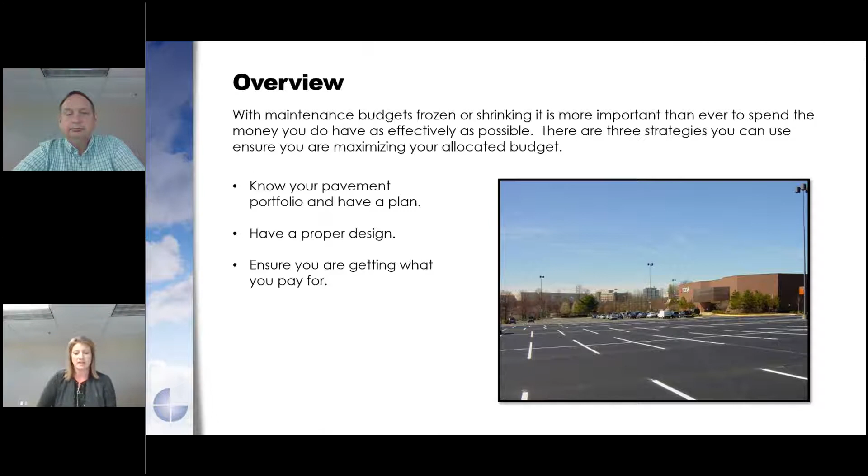So the overview for today: Troy and I are going to share with you the 3-point strategy that we feel you could follow to best manage your pavement assets. Why is this important today? Well, in light of COVID-19, we're seeing budgets frozen and less money available for projects. So now more than ever, it's important that you are as effectively as possible managing and maximizing your allocated budget. We hope you find the tips we share today helpful.

The first step in the 3 points is evaluation. Really, when it comes to evaluation, it is knowing what you have and what it needs. In some cases, we actually find that your pavement or your roof is valued at more than what you think.

So we are going to start off with our first poll question today. Ben will be leading the poll question, but just to give you a heads up, the question is: what is the average asset value of an asphalt parking lot per square yard?

As Elise mentioned, we are looking to see what your thoughts are on the average asset value of asphalt. We have 4 options: $35 a square yard, $45 a square yard, $55, and $65 a square yard.

As we wait for everybody to have a chance to respond, I thought I'd take this opportunity to ask Troy, with your history as a contractor, how has that shaped your perspective as a consultant, or given you more insight into the construction aspect of benchmark services?

Well, I'd have to say, Ben, that from a design standpoint, when we're putting together designs for rebuilding parking lots, I've got the background to know what the contractors can do in certain size areas. Some methods of construction won't work well in smaller areas. That's a big benefit, knowing what the contractors can and can't do as far as equipment.

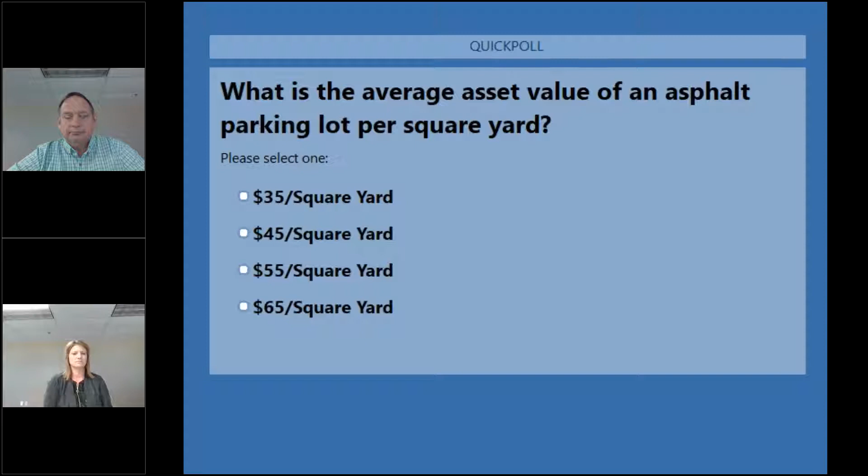Thanks, Troy. We have a few more votes coming in, so I'm going to go ahead and close that now.

And the results: 9% voted that they think it's $35 a square yard, 36% voted $45 a square yard, 45% voted $55 a square yard, and 9% voted $65 a square yard.

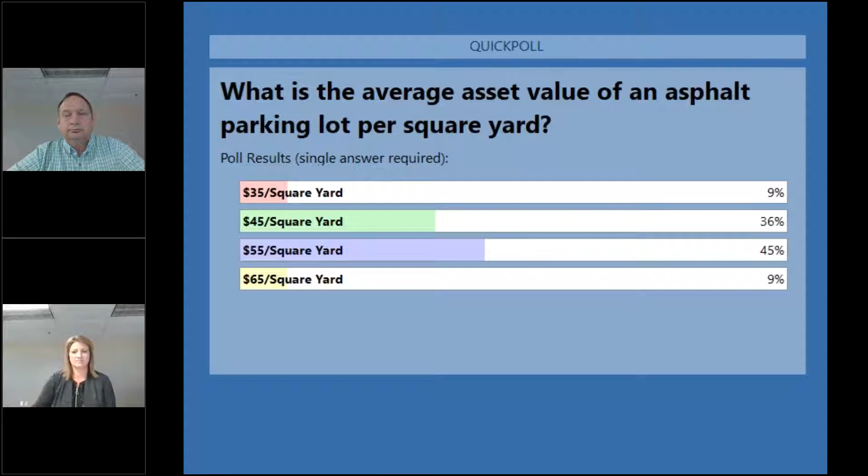All right, thank you, Ben. So the average asset value for an asphalt parking lot is $45 a square yard, and we will preface this with saying this is a very rough estimate. It can change based on geographic location.

We also wanted to include, while we didn't have a question for you to answer, the average asset value for a concrete trucking area, approximately $110 a square yard. So why do we share this with you? Well, we share this with you today just to give you an easy way to quickly determine what your asset value may be.

So with a typical car stall, it'd be between $1,500 and $2,000 per car stall. And with a trailer stall, we'd be looking at about $5,000 to $6,000.

So let's say you have a 500 car stall asphalt parking lot. Your asset value for that lot would be between $750,000 and $1 million. And if we were to relate that to a trailer stall, if you had 300 trailer stalls, the asset value would be approximately $1.5 million to $1.8 million. So those are definitely high asset values and something that you want to preserve and take care of.

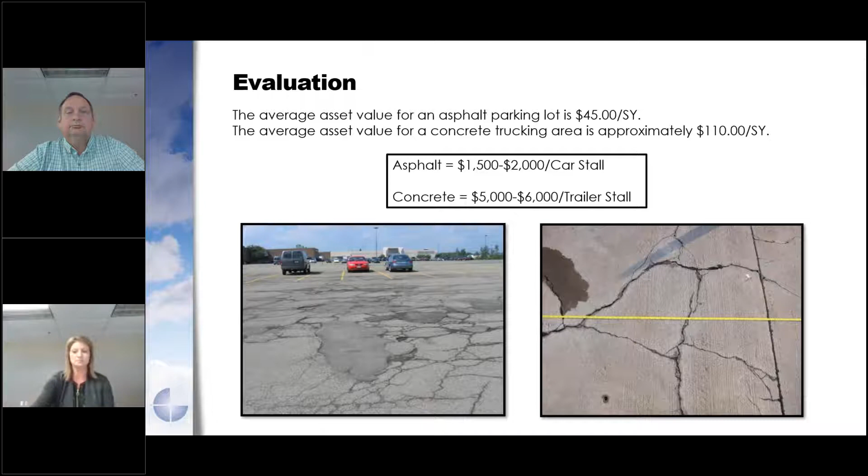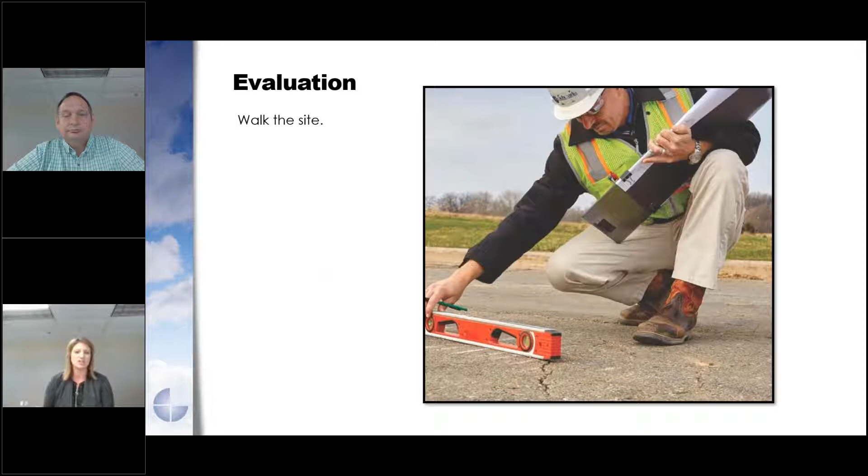So when it comes to the evaluation, the very first thing that we would recommend you do is walk the site. As Troy likes to say, boots on the ground. So making sure that somebody is physically walking your site and observing all the different conditions, taking a fresh set of eyes and looking at each individual section, each individual area, and getting a general overview of what those conditions are.

Then during that evaluation process, we would recommend that you document your findings. Things you may want to document would be your areas of repair, areas that need maintenance, maybe an area that needs an overlay. You may also want to document your photo locations.

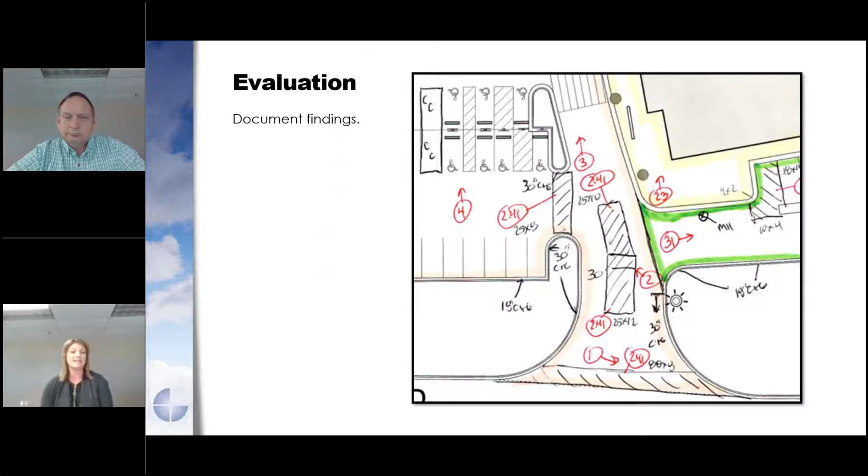It's always important that when you're out walking the site that you're also taking photos. You may want to take photos of general areas and general conditions, and then specific deteriorated areas. You'll see here the example on the plan, we show the little photo bubble listed so that we could then reference the photo at a later date. So that may be something. You would also want to document any safety issues that you may find as well.

So during the evaluation process, you've walked the site, evaluated things, and then you also want to measure the areas. So when we say measure the areas, we mean the areas of repair, but also making sure that you have correct measurements for your site.

And why is it important to have measurements? Well, it's important because if you were to give this plan that you're putting together to a contractor to price for you, you would want to make sure that their proposal, when they get it back, can be cross-referenced and that it does tie off to the dimensions and the areas you have identified that need repair during your evaluation process.

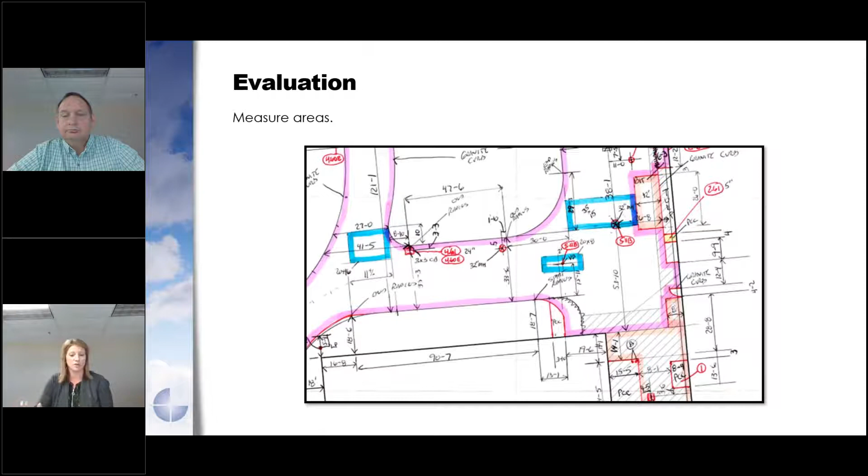These are really good documents to have when you're going for funding. If you have to go up the corporate ladder, having actual data to back up what you're requesting will make it a lot easier for you to secure funds for your projects.

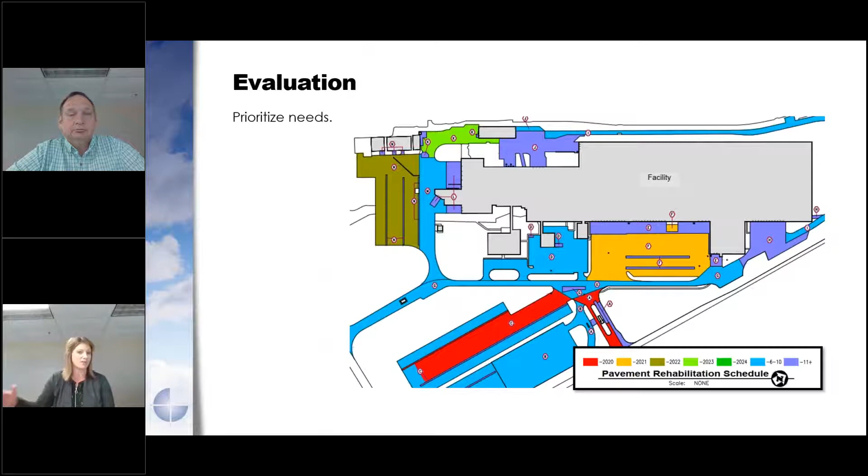Absolutely, great point, Troy. And it is showing not just a single year that you're planning to request money for, but that you have a long-term plan in place for maintaining your pavement asset.

So another piece of the evaluation is planning. Once you've walked your site, documented your conditions, measured your site, and put together the priority plan, the next thing you need to do is determine the course of action that's needed in each individual section.

You may have thousands and thousands of square yards of pavement at your site, and not everything is in the same condition. So you need to assess each of those conditions to determine if maintenance work might need to be done, or maybe rehabilitation work may need to be done.

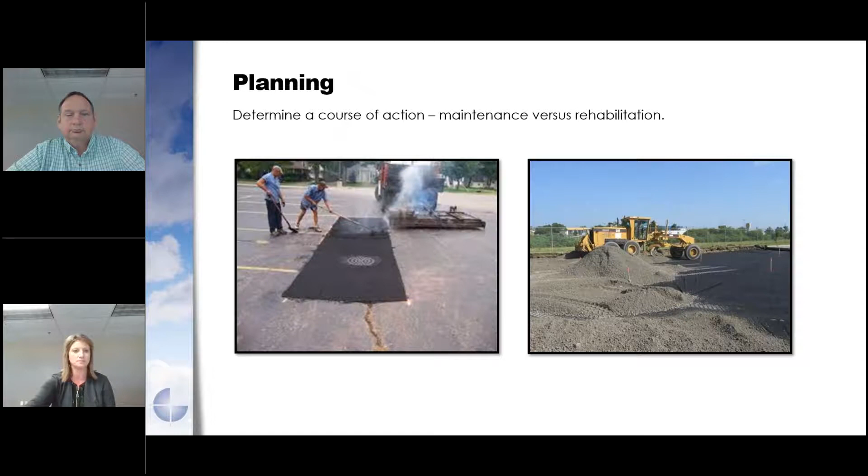I'm going to share with you a picture of a typical deterioration curve, with no maintenance being done. We're sharing this because we have a poll question coming up, and just want to get you familiar with the different conditions.

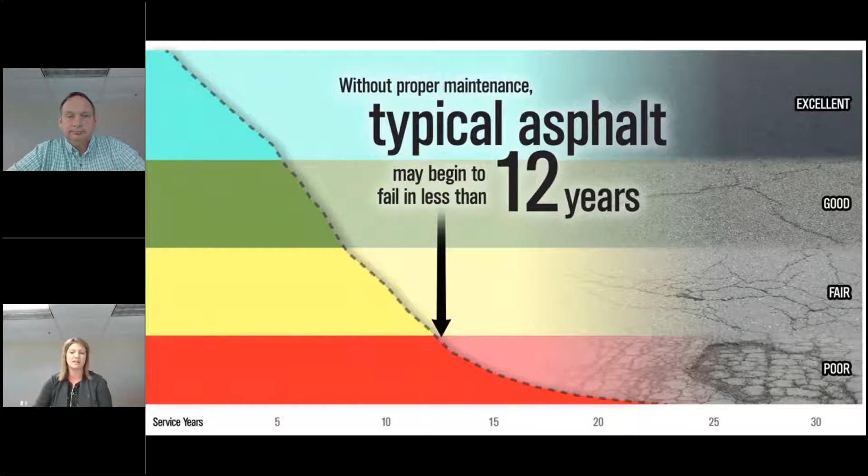So we're going to have another poll question here, and I will hand this over to Ben for poll question number 2. Thanks, Elise. Poll question number 2 is: which of your pavements should you spend your money on first? Excellent pavements, good pavements, fair pavements, or poor pavements?

And while we give people time to respond, Elise, I absolutely love your dog, Rue, and just wanted to get an update to see how he's doing.

Oh my goodness, Rue, well, she is mischievous. She is my one-year-old mini golden doodle, and I absolutely adore her. Funny story, Ben—yesterday morning I was working out and she was being pretty quiet, and I thought, I'm gonna go check on the dog after I'm done. Well, she clearly doesn't understand the shortage of toilet paper, because in the living room she had an entire roll of toilet paper and had destroyed the entire thing. So I think we need to talk to her about the shortage of toilet paper, because we can't afford to have her continue to do that. But she's definitely mischievous, and super cute. She keeps us on our toes.

That is good to hear. And we added a photo here, so we'll be able to share a photo, and everybody can see how adorable Rue is.

It looks like our answers are all coming in, so I'm going to go ahead and close the poll. And here are the results: 6% said you should spend money on your excellent pavement first, 31% said spend money on good pavements first.

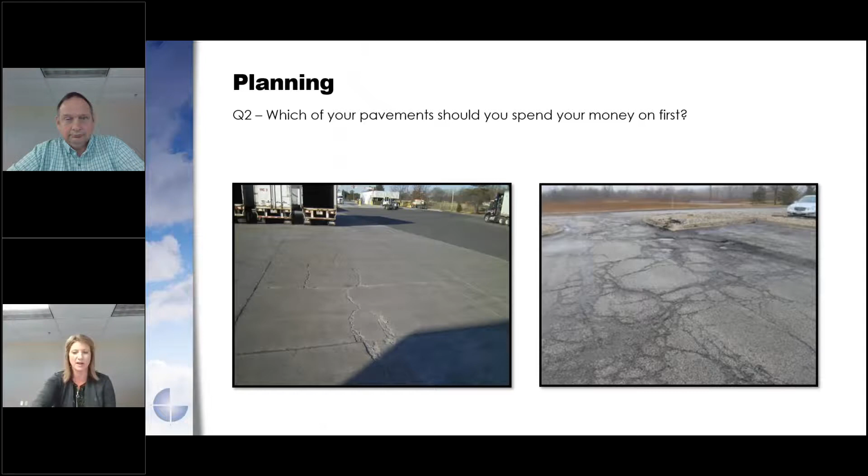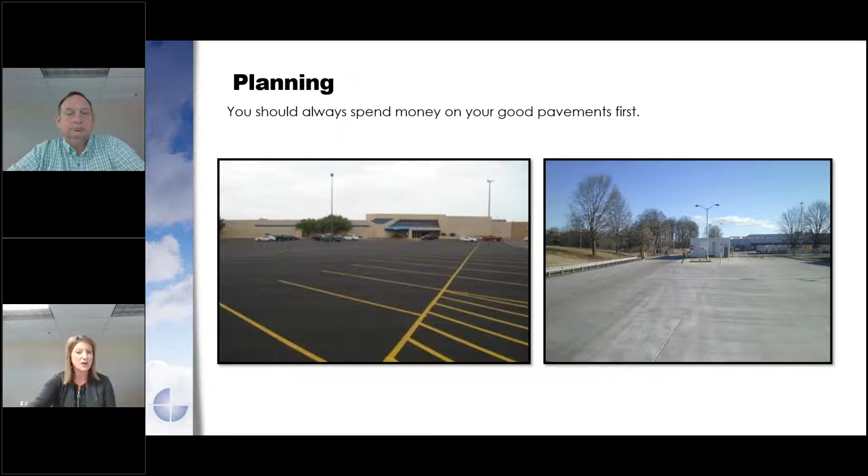So during the planning phase, you actually should spend money on your good pavements first. You're probably wondering why we'd say that. Well, we have good reasoning. Studies show that in the long run, doing maintenance will improve the overall pavement asset and life expectancy of your pavement.

Maintenance could be things like crack sealing, curb and gutter repair, potentially patching, and other miscellaneous things. But it's critical that for pavements in good condition, you're doing the necessary maintenance needed to preserve their condition.

When we say correctly, we want to make sure that if you're having a contractor come out to do the crack sealing, that they're not crack filling but actually sealing the cracks, and that they're routing the cracks before they seal them. Certainly if you have any questions, feel free to reach out. But crack sealing is probably the most cost effective maintenance item to preserve the asset of your pavement.

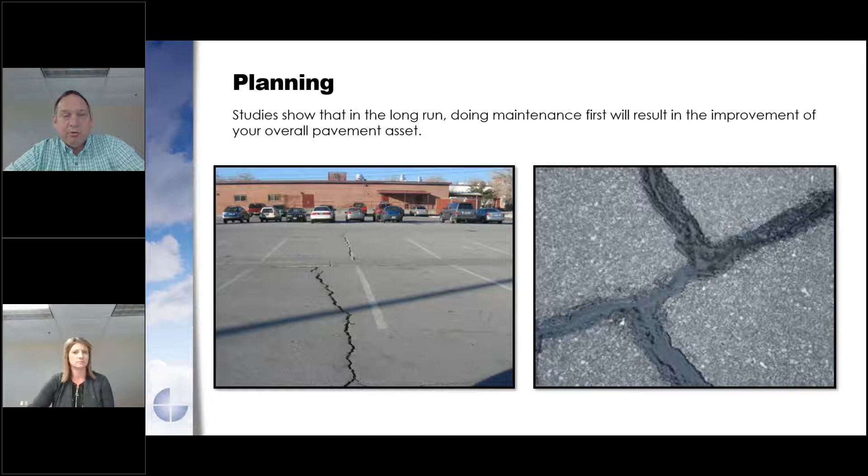Yeah Elise, it's very important to keep water from getting into your pavement system. Water is the number one cause of pavement premature failure.

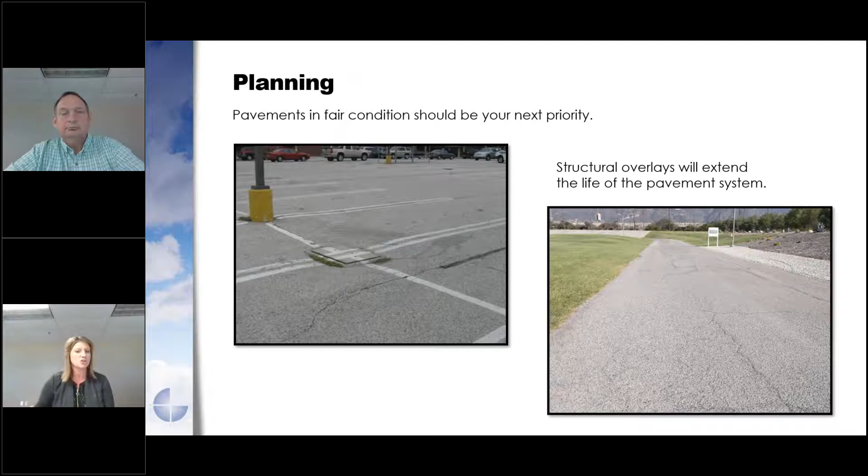So the first place you should spend your money is on your good pavements, followed by your fair pavements, and then your worst condition pavements should be your lowest priority. Obviously this isn't an ideal situation. One reason we say your worst pavements should be your lowest priority is assuming you're not having safety issues and it's not impacting the overall traffic at your facility or operations.

Reconstructions can cost 3 to 5 times the cost of an overlay. So what you really want to do is identify pavements when they're in fair condition and perform that structural overlay before they get to the point where they're in poor condition and require reconstruction. You're definitely going to save money in the long run if you can take care of those pavements before they hit poor condition.

Yeah Elise, the cost of a reconstruction is not going to change much from this year to next year or even two years, so delaying these projects is not going to impact the cost to reconstruct them. Obviously you want to do pothole patching, keep it safe, make sure nobody's going to trip on anything, but it doesn't hurt financially to delay the reconstruction of these pavements.

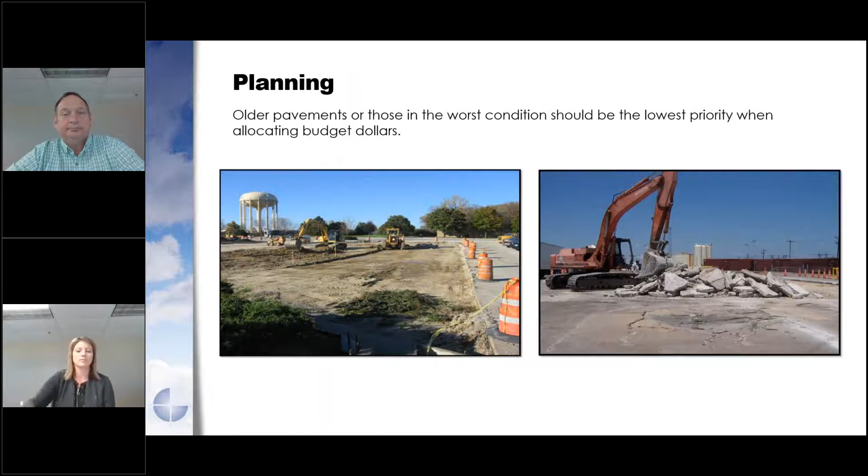So we wanted to share with you this new tool we've recently developed, which shows you the difference between a reactive approach versus a proactive approach. For this particular example today, the asset value of the customer's pavement is estimated at $13 million.

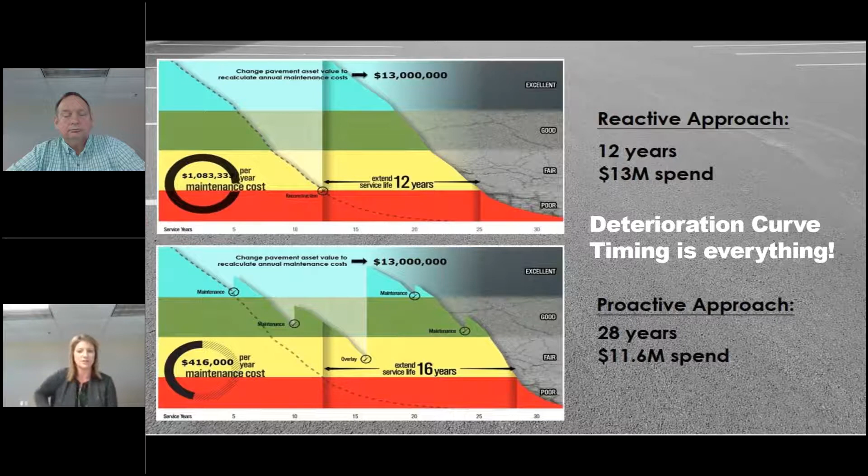Okay, now you've done the first strategy, you know what your plan is. So the second strategy for properly managing your pavements is to have a proper design. If we're going to spend money, we want to make sure we spend it correctly. So how do we go about getting a proper design?

Well, the first thing you should do is find, if you can, the original construction documents or any documents from any repaving or overlay to help gather information on what's there. Any existing information is going to be very helpful in the design phase.

The next thing you should do is geotechnical exploration—punch some holes in that pavement, do borings. What the borings will show you is the thickness of the asphalt, the thickness of the existing stone base, the makeup of the subgrade, what type it is, and it'll also show us the moisture content, any moisture that's present.

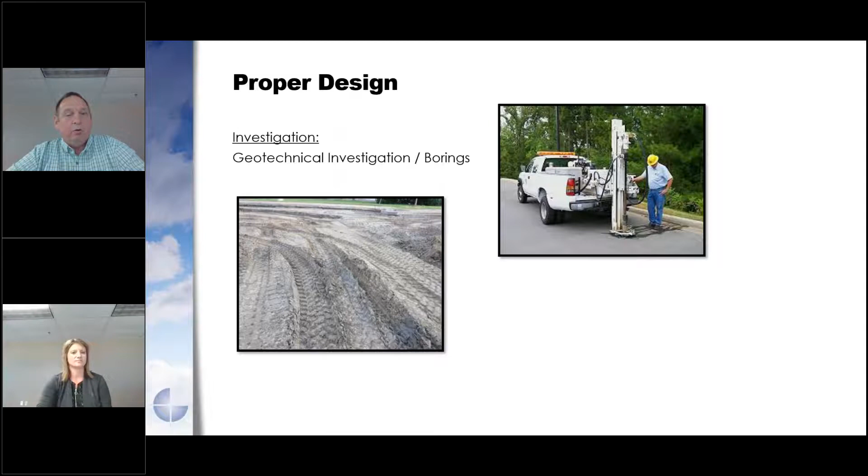Because the last thing we want to do is start excavating that pavement and end up with a subgrade that looks like the picture below on the left, because asphalt or concrete pavements are only as good as what we build them on. So base is critical. And if we don't know what that base is when we're doing our design, we cannot do a proper design.

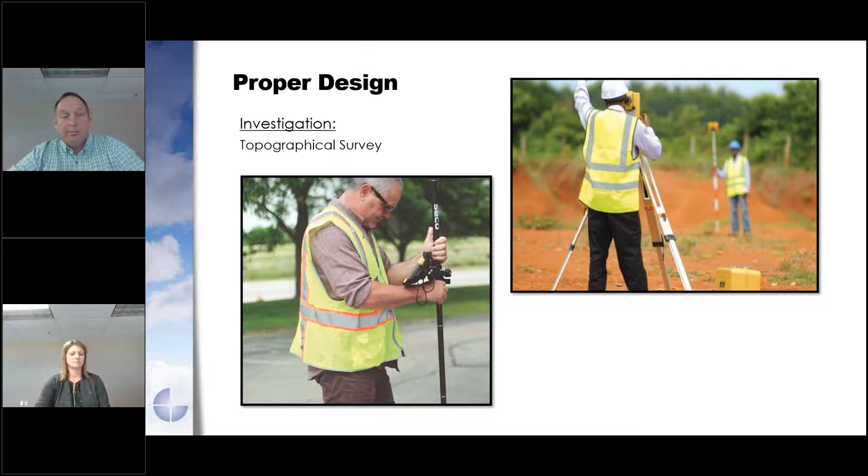Next thing is to shoot grades. We want to make sure if we're going to redo a parking lot, we get the grades right and correct any problems, any elevation issues causing water to pool on our asphalt or concrete. So you want to make sure that your grades are taken when you're putting together your design.

Okay, that will take care of your surface drainage, but now we also want to think about subsurface drainage. This is a really good time to check out your existing storm sewers, catch basins, look down in those, make sure that they're in good condition. If they need to be reconstructed, they should be reconstructed before that new pavement is placed.

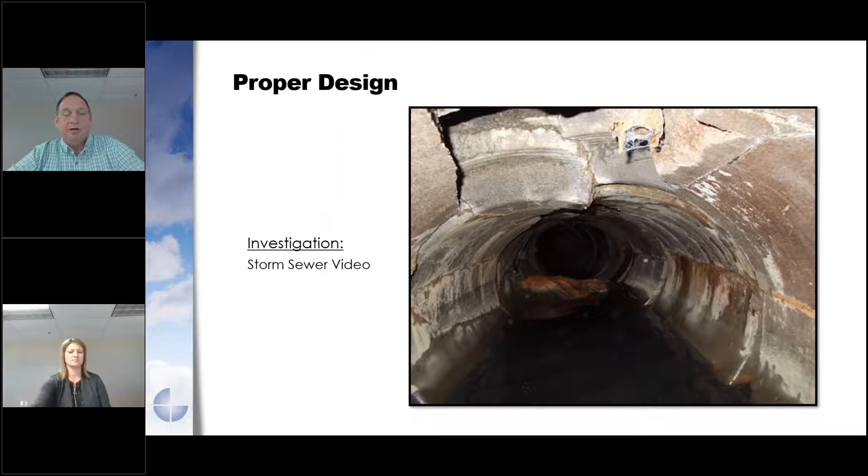As you can see here, this is a still shot from a video that was done of a storm sewer. You can see the concrete is failing. You want to repair that before you repave the parking lot, not afterwards when you have to have a big patch in your parking lot. So this is a good thing you need to do before reconstructing a parking lot.

The next part of proper design is traffic usage. It has to be designed for the type of traffic you're going to use on your parking lot. There's a big difference between a trailer parking area, a car parking area, or bus routes around a shopping mall ring road.

We have to make sure that we take into account the traffic that's going to be on that new pavement. Troy, when we talk about traffic usage, it's always interesting to me to hear some of the things that you see out in the field. Maybe you could share a little bit about the garbage trucks and the routes that they may take and the impact on the pavement.

Yeah, garbage trucks are a big issue. They're generally some of the heaviest loads we have on our pavements. Most businesses and companies keep their garbage dumpsters way in the back, hidden, which makes sense. But then that garbage truck has to drive through your site to get to the back, so they're traveling over a good percentage of your pavement.

And if you're their last pickup before they head off to the dump, that truck's going to be pretty heavy. So we want to make sure those routes are designed to support those garbage trucks, and also the pad or that area in front of the dumpster is constructed so that when they lift the dumpster and that extra weight is bouncing on the front of that truck, that pavement's going to hold up as well. So when we're doing our design, it's kind of like an algebraic equation. The design has to be greater than the deficiencies in the subgrade and the amount of traffic that pavement's going to carry.

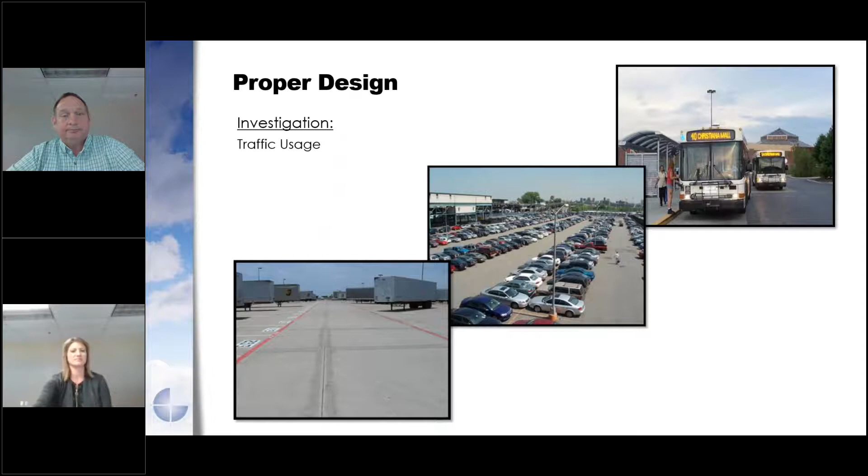The next point I wanted to make on design is, although it's okay to have a master specification that your company uses, make sure that each design for each specific area is site specific. We don't want a cookie cutter design that we use everywhere in every parking lot or every trucking area, because each one, because of all those items I've already discussed, needs to be specific to that particular area of pavement.

Here's some examples of site-specific plans. On the left, this detail shows everything the contractor needs to know when he builds. This is a stone curb detail. There's no question this is what he needs to do when he bids it.

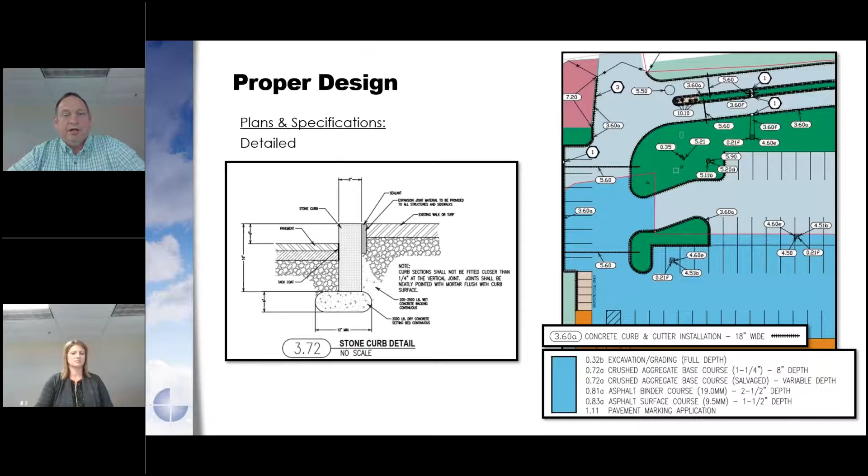The example on the right shows the work order that's going to be done. It's an overview, and you can see that it's color coded. The contractor can look and see that in the blue area he's doing these specific items. There's work codes for each, for example, catch basin adjustments, curb and gutter. So there's nothing left to chance when the contractors are looking at these plans and specs.

The other thing you should include when you do your design is contingencies for unforeseen items. This is probably the biggest thing that causes issues on projects: soft areas, buried items that we couldn't see. So you want to try to build these items into your bidding documents.

So these contingency items will prevent cost creep on your project. They can also help to keep the project on schedule, because you don't necessarily have to stop the project to get a change order if you have some of the contingency items built in. Good point.

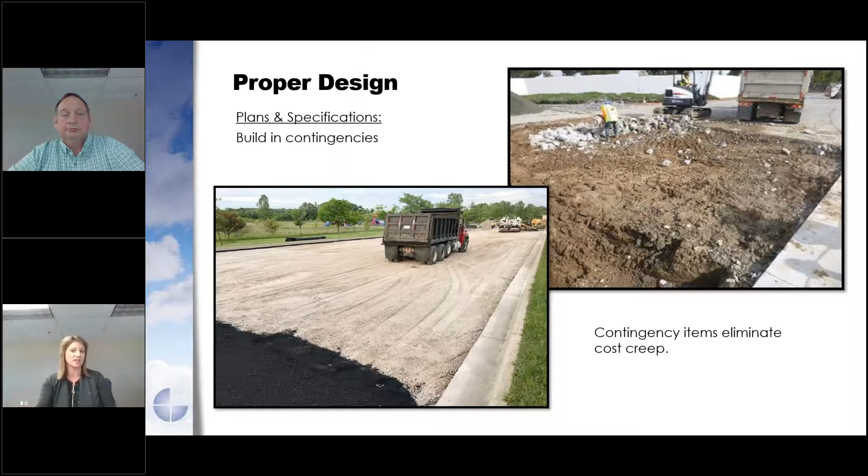And so this eliminates any unknowns. The contractor doesn't have to put in any kind of fluff to make sure he's covered. He knows he's going to get paid for what he does, and the owner knows that they're only going to pay for what gets completed.

So this is what we recommend, and this is what you should use when you do your design.

One thing with unit price bidding I like to bring up is there are clients we've worked with who have bidding systems designed to bid on a lump sum basis. We've had to get creative with some of those clients, but we've found that even though their systems only allow a lump sum bid, we could still request the contractor to submit unit prices that total up to that lump sum bid.

We recently did this with a client in the last couple of months. Because they changed from lump sum bidding to unit price bidding, we were able to save them $20,000 at the closeout of the project, because they weren't paying for items that hadn't been installed or weren't needed. So we definitely have to get creative, but there are some workarounds even if a system is set up to only do lump sum bidding.

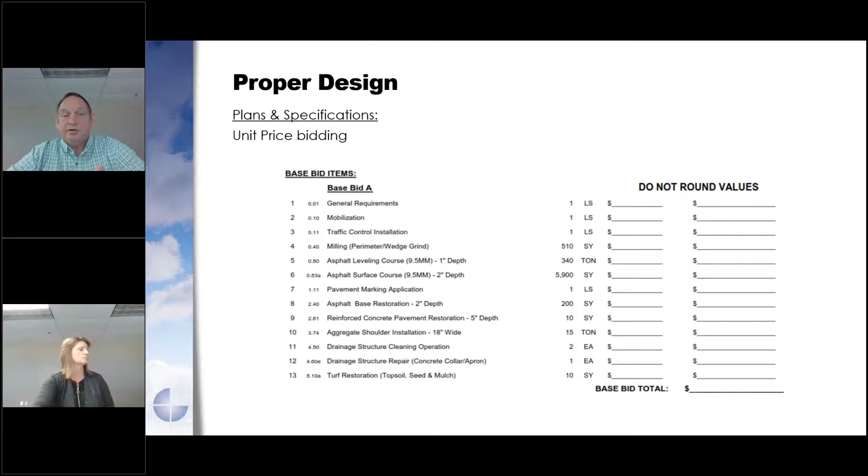Okay, with proper design, we're going to throw in one of our poll questions here. The question is, after developing or receiving a detailed set of plans and specifications, when is the ideal time to bid your project? And the answers to that question are winter, spring, summer, and fall.

As we give people time to answer that poll question, Elise, what is one thing you have learned during the COVID-19 event that will impact how you work with clients moving forward? Oh goodness, I've learned more than one thing, but I think the one thing I've learned the most is technology.

Whether it's learning new technology to use or just learning how to utilize technology to stay connected. We'd certainly love the opportunity to meet with clients face to face, even with some of our team members, but because we can't do that today, we've figured out how to make technology the next best thing and to really stay connected with our clients and customers during this time, especially using cameras more. So I'd say technology is probably one of the things I've learned the most over the last 8 to 12 weeks.

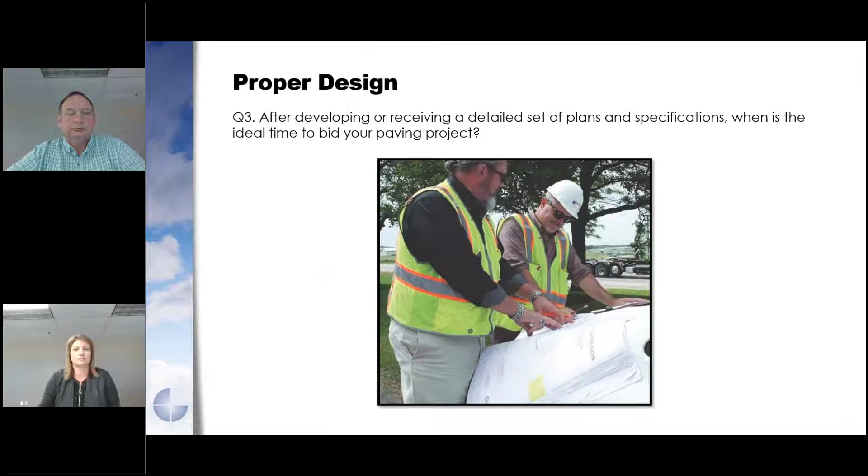Thanks, Elise. It looks like the votes have slowed down, so I'm going to close the poll. The results to 'after developing or receiving a detailed set of plans and specifications, when is the ideal time to bid your project': 53% voted winter, 26% voted spring, 3% voted summer, and 18% voted fall.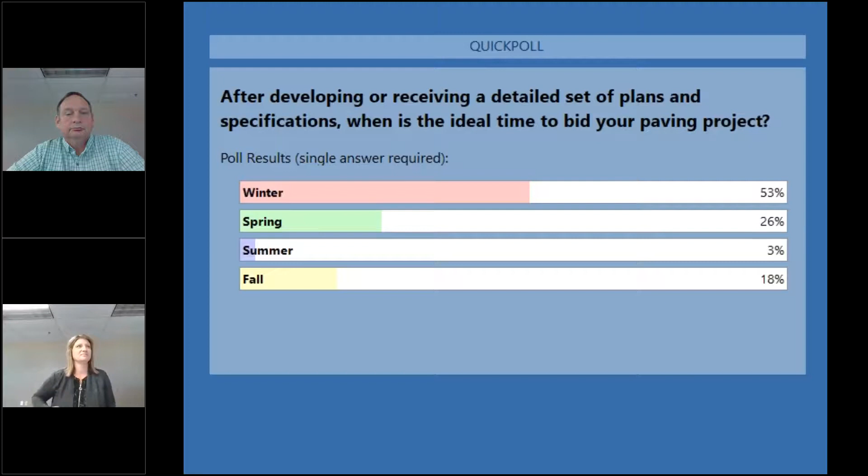Thanks, Ben. In my opinion, the best time you can bid your projects is late winter, early spring. So there's kind of two answers that are correct here. The best time to bid is obviously after the contractors have completed all their summer projects. Things are slowing down for them. They've got time to analyze the bids more closely, talk to more subcontractors, come up with more creative ways to do the project, find closer or cheaper fill sites to get rid of material. So we're going to get better pricing. They're also trying to fill their schedule for the following summer. So we definitely want to be bidding in late winter, early spring.

Along with that, we want to make sure we have our plans and specs ready to go to the contractors at that time. So we better be a year ahead on our plans and specs for our construction projects if we can do that. Also, by bidding early, we'll be first on the list when the plants open, the concrete and asphalt plants, so that your project will be built in the middle of summer when it's nice and warm, which is the best time to lay asphalt pavement, and you won't be doing your paving in October, November when snowballs are hitting you in the back.

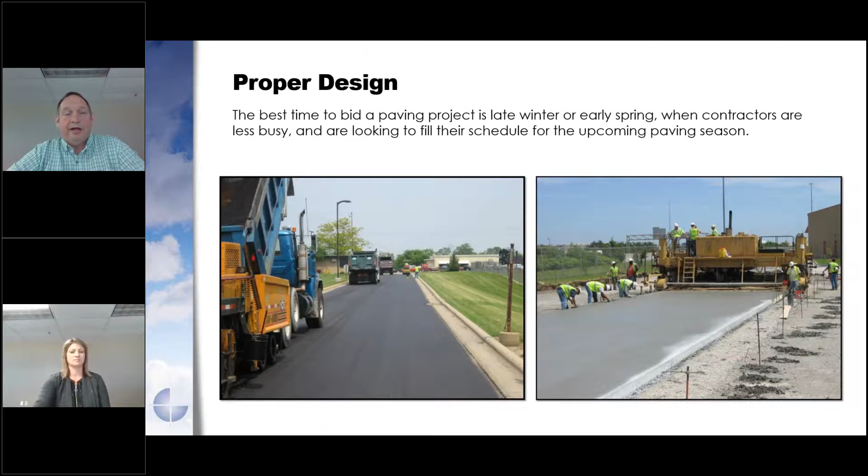Also, getting a little jump on your bidding and having these projects lined up means you can get the permitting processes done, and that sometimes can take a lot of time to go through a city if you're adding a new roadway or just repaving a parking lot. Sometimes a lot of these municipalities require reviews, and that can take some time. So we don't want to delay our start time into the first part of June.

Okay, so now we've come up with a plan. We have detailed plans and specs for a proper design. So the third strategy is making sure we're getting what we paid for. How do we do that? Well, we do that through project oversight and inspection. Whatever design you come up with is worthless if your contractor does not build it per the plans and specs. So project oversight and inspection assures that design is followed.

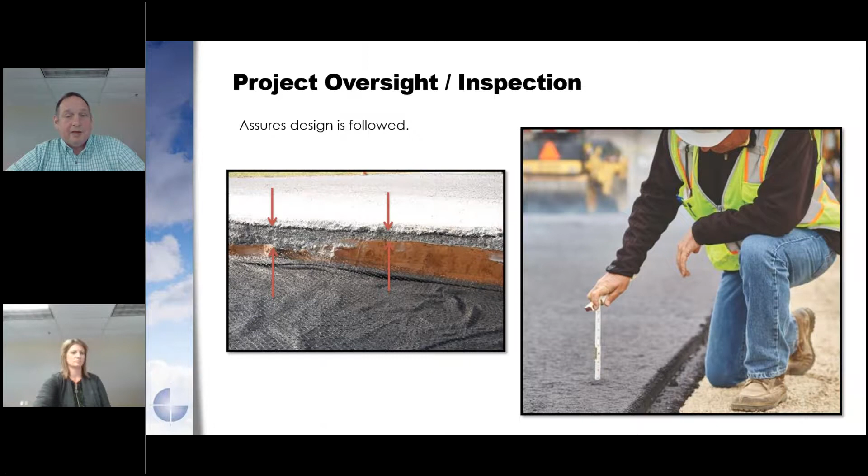In this slide on the left, this was a project I was on several years ago. As we were excavating, we found that the stone base went from probably what was designed, and then all of a sudden we're getting half or less than half of that stone being placed underneath that pavement. I'd like to think this was just sloppiness and not intentional, but I guarantee that pavement where that stone isn't to specification is going to fail prematurely. So we want to make sure you have full-time inspection, making sure these projects are being built properly.

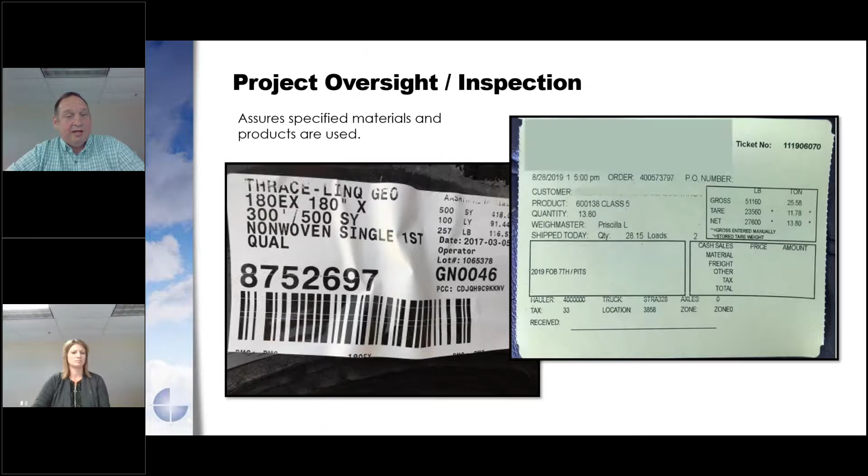The other thing project oversight and inspection will do is make sure that the materials being delivered match the specification. Almost all materials delivered to the site will have some kind of tag or load ticket involved, so you can look at that ticket when the material comes, make sure it meets the specification, and either okay it to be installed or reject it so the contractor can get the right material.

Good project management or oversight also will make sure that the contractor has proper traffic control and safety in place. In a retail situation, if a customer, or even one of your workers, got into the work zone by accident and got hurt, it could be quite a litigation issue. So we definitely want to make sure barricading is in place and keeping people out of our work zone. It can also eliminate people walking through your new concrete.

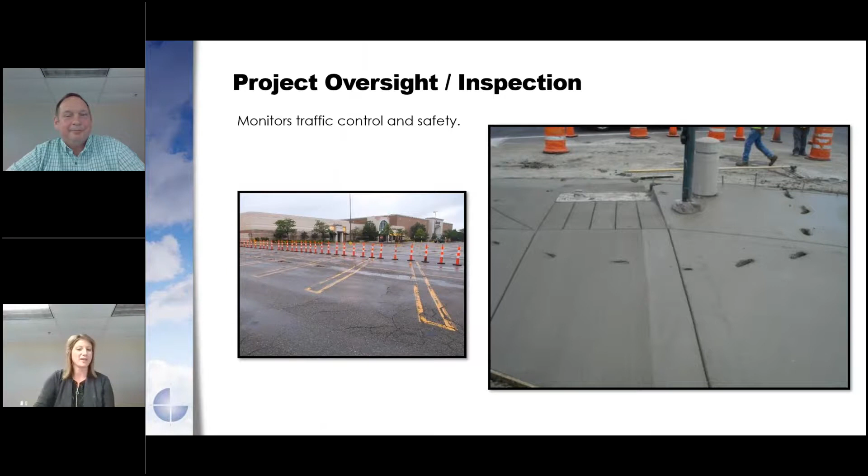Hope that wasn't your project, Troy. No, that was one of ours, but it was not mine.

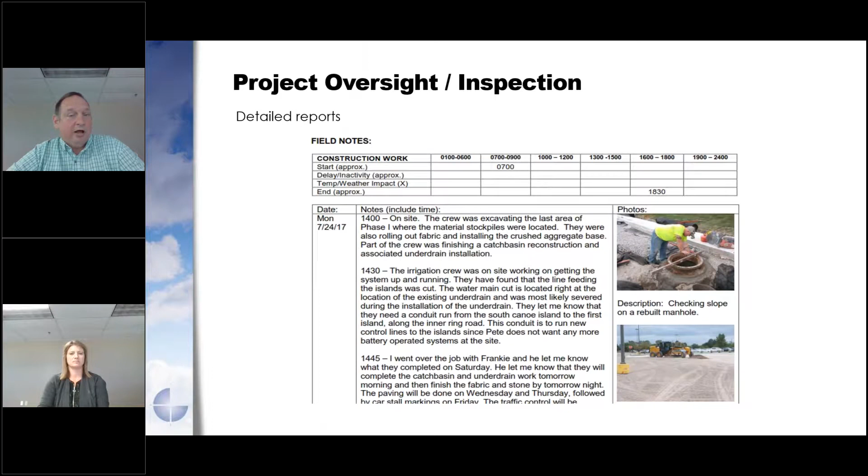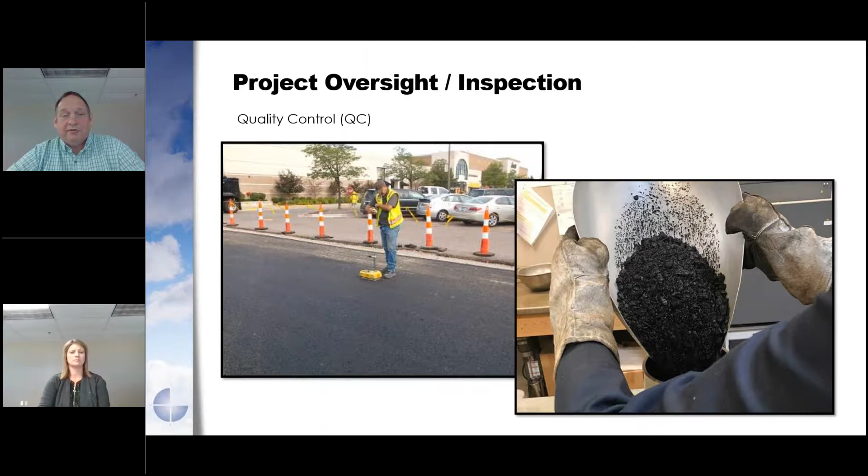Also, besides making sure we're getting the right products delivered to the site and installed, we want to do quality control. The photo on the left shows a technician doing nuclear testing of the asphalt, to make sure the asphalt is compacted correctly. Also, you should take samples of materials delivered to the site and have those tested to make sure they were mixed properly with the right ingredients, the right percentages of either concrete or asphalt. Both can be tested to make sure they meet the specifications. And if they don't, they should be rejected and sent off the job site until the right material comes on site.

At that time, we were able to get an under drain installed below the pavement system that carried the water to a catch basin and into a storm drain system, so that the subgrade will stay dry, and that pavement system will stay dry and perform as expected and last as long as expected. Having somebody there to make these kind of decisions and catch this stuff is very important. It'll save you money, and in the long run, your pavements will last longer.

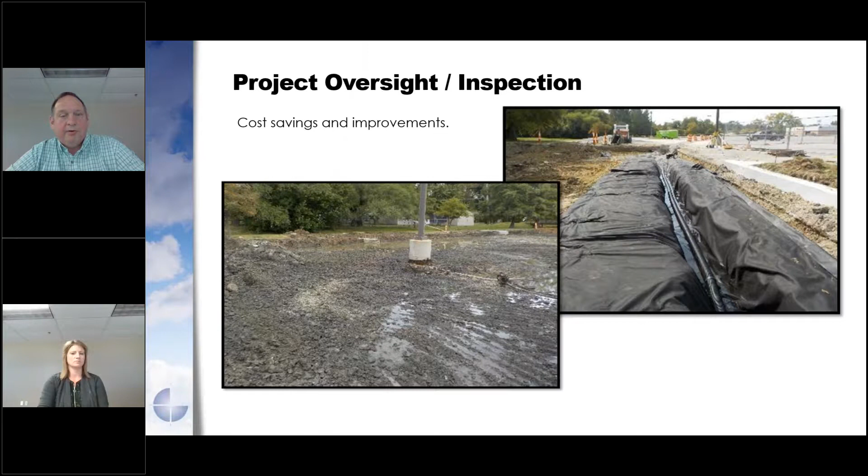The other thing with full-time inspection is cost control. Going back to unit price bidding, with full-time inspection you'll know exactly what is being done each day, and those quantities can be tracked. So at any point in the project, you'll know exactly what it's costing.

If you're on track to stay under budget, make sure you're not going over. Also, if you're under budget and want to expand the project, do a little more paving—we can quickly determine if the money's available and how much area we can do by using unit pricing. Or if the project's going over because of unforeseen things, like having to install an under drain, we can cut the project back a little, do 50 feet less roadway, and stay in budget.

Using this kind of information in a spreadsheet helps make sure your project stays on track budgeting-wise. One of the things you talked about before in the bidding phase was contingency items. In this example, both the utility repair allowance and the stone undercut are contingency items. In this case, the client isn't spending $30,000 that was built into the bid because there wasn't a need for those items during the project scope. It saves them money, but also allowed you to build in those contingency items in case you needed them.

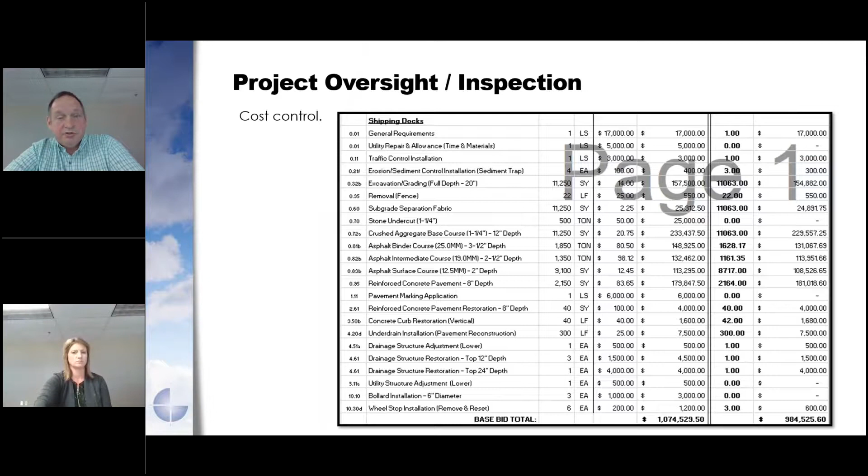It's a great system. In that case, you'd take that extra contingency money and maybe do some maintenance on another part of your lot, or some more work.

If full-time observation or inspection isn't in your budget, you can do what we call a post-construction audit. Once the project is done, have somebody come in, inspect the pavement, make sure everything was done per the plans and specs, and nothing was missed. That person can also measure the pavements placed, get actual in-place measurements in square yards, and collect the load tickets from the contractor.

We can determine if an area was supposed to get 3 inches of asphalt, which requires a certain amount of material. Using the load tickets the contractor supplies, we can determine whether the full thickness of asphalt was placed or if it was deficient. Generally they're within a couple percent, but every once in a while the amount of material doesn't match what was required for the thickness in that area.

In that case, we've recommended doing cores of the pavement. I hate to punch holes in a brand new pavement, but when a situation involves a lot of money, you punch cores to verify that information. Then we can recommend either leaving the pavement in place and getting a credit back to the client, or having the contractor rip it out and put it back in properly—which a lot of our clients don't want to do because they've already had the parking lot shut down. And although a deduct or credit sounds like a good idea, you're still getting a deficient pavement.

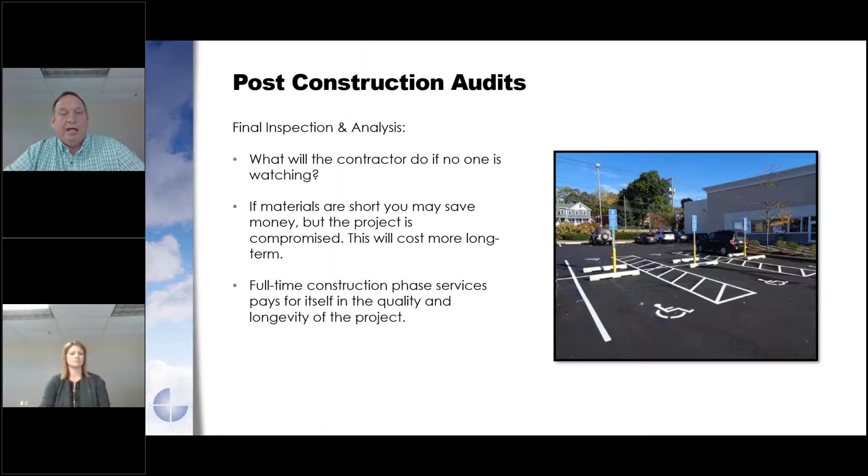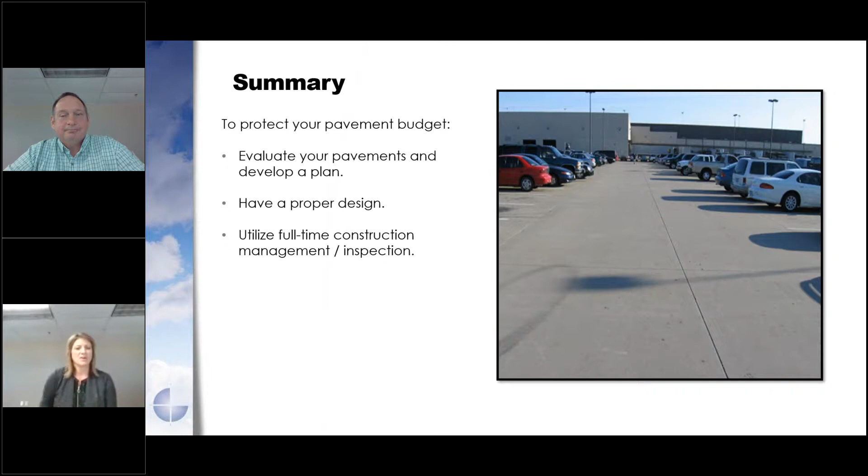So in summary, the three strategies for properly maintaining your pavements are: know what you have, have a plan, develop proper designs so you're spending your money wisely, and thirdly, utilize full-time construction management to make sure you're getting what you paid for. Thanks. All right, Ben, that's all we have to share today.

So do you want to let us know if any questions have come in, if there's anything Troy and I can address while we've got some additional time? Yeah, absolutely, we have a few. The first one's more of a comment than a question—on poll question number 3, you said to bid it in early spring, and it sounds like this person lives in a northern climate where that doesn't exist. It's just a long winter, a few months of summer, and back to winter. We can relate, being in Wisconsin—absolutely, we can relate to that.

So the first real question is regarding the first poll question. They ask: is the $45 a yard for asphalt and $110 a yard for concrete an estimate for the materials, or is that the all-in cost for the install? That would be the all-in cost—it's not really an installation price, it's an asset value, as in if you were building a brand new parking lot from scratch.

So if you had a parking lot that didn't have a good base, had water issues, you had to totally rip it out and redo it - those are what those numbers represent. They were an asset value number, not a reconstruction number, because a lot of times if your stone base is in good condition, all you have to do is remove the existing asphalt, make some changes, maybe thicken up the asphalt, remove the concrete, thicken up the concrete. So those are replacement cost values - asset values, not necessarily what your construction costs are going to be.